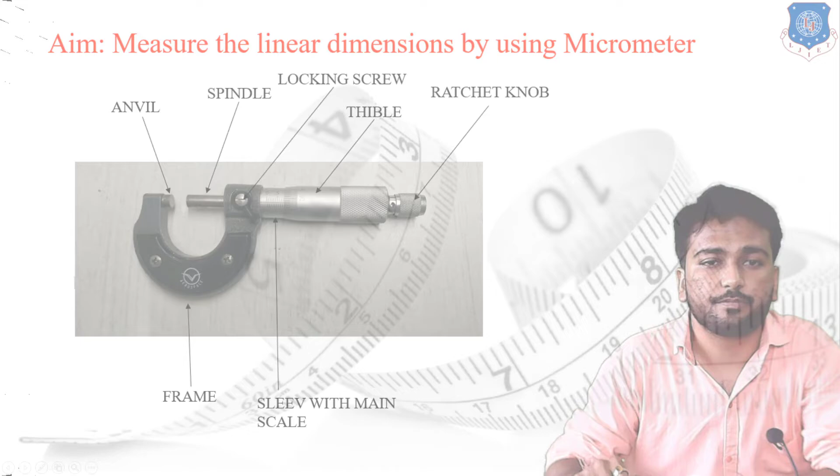We have the micrometer.

As we have discussed in the micrometer section, this is known as an anvil, this one is a spindle. The particular rotating scale is known as a thimble, on which there are total 50 divisions. This particular sleeve contains the main scale. The minimum distance marked on the main scale is 0.5 mm.

The last portion is known as a ratchet. The ratchet is generally used to close your micrometer. Once the micrometer has been closed, to lock it with a proper firm physical contact, we use the ratchet knob. This particular sound shows that your micrometer is properly closed and the physical contact is firmly placed.

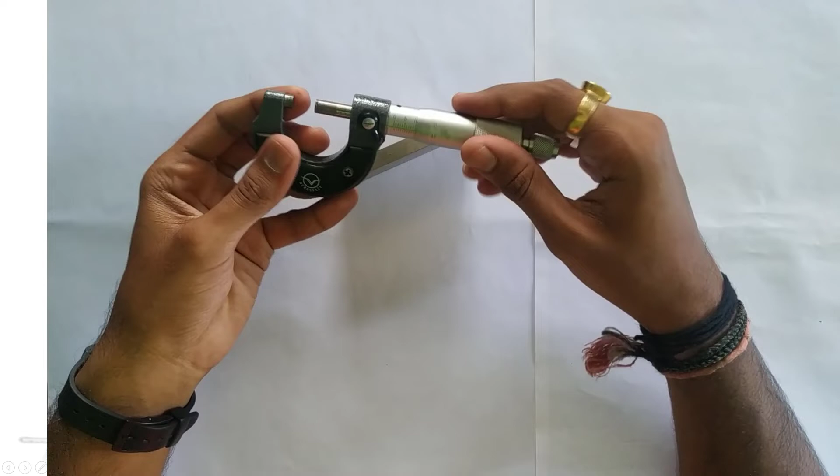So let us start the reading by using the micrometer. First of all, we are going to find out the thickness of the given component. To measure it, first extend your micrometer, then place it to make proper physical contact with the surface, and then close your micrometer using this ratchet knob.

The particular sound shows that the surface of the anvil and the spindle of the micrometer is properly and physically attached with your given workpiece. Now we are going to take the reading.

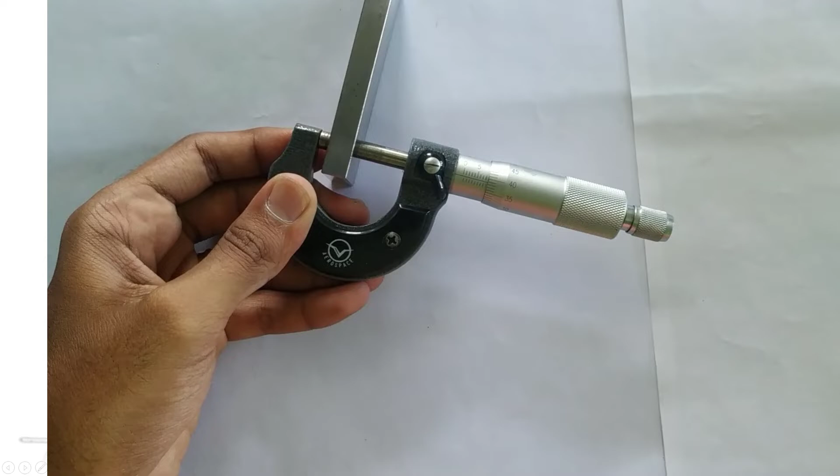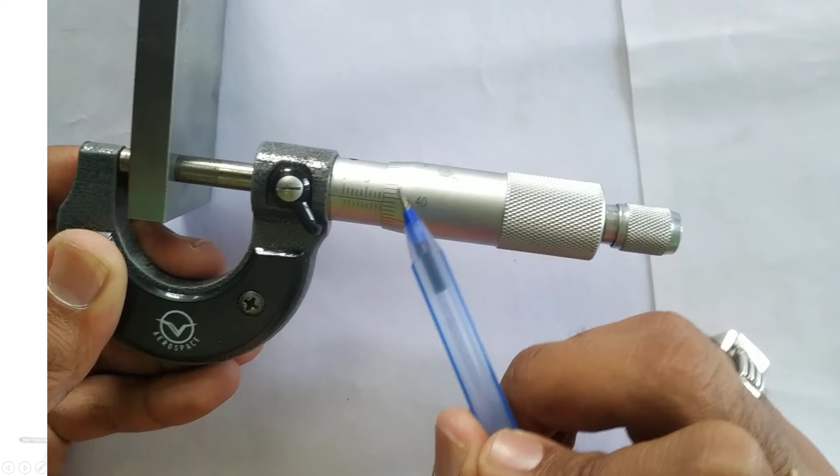For the reading purpose, first check the main scale. In the main scale, as you can check, some divisions are placed above the line and some divisions are placed below the line. So to take the reading, we have to check both divisions.

The upper division shows 0 mm, then the second one is 1 mm, then 2 mm, 3 mm, 4 mm, 5 mm, 6 mm, and so on. The bottom section shows 0.5 mm, then 1.5 mm, then 2.5 mm, and so on.

So to measure the dimension, first check 0 mm, then 1, 2, 3, 4, 5, 6, 7 and 8 mm. The division of 8 mm is properly visible. Then moving to the bottom side, you can check that 8.5 mm is also visible. So we can say that 8 mm and 8.5 is visible, and the main scale reading is 8.5 mm.

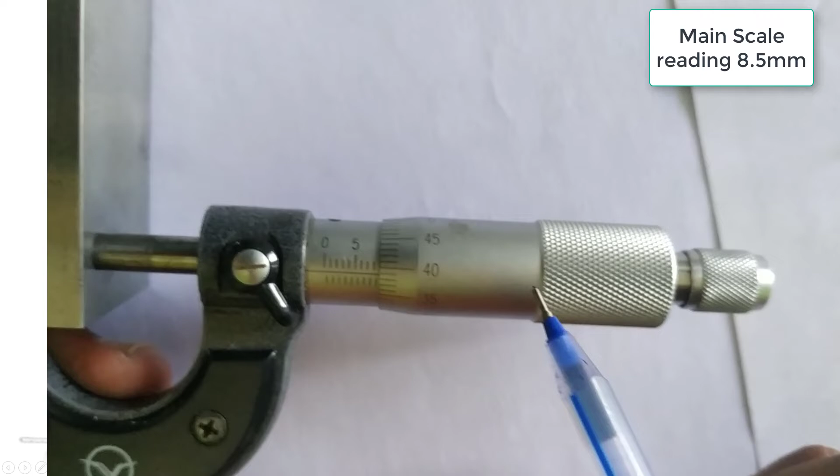Now moving to the thimble line. Check which particular division horizontally coincides with the center line. So here we have 35 mm, then 36, 37, 38 and 39. The line at 39 properly coincides with the horizontal line. So we can say that the auxiliary scale reading is 35... the division is 39, and the main scale reading is 8.5 mm.

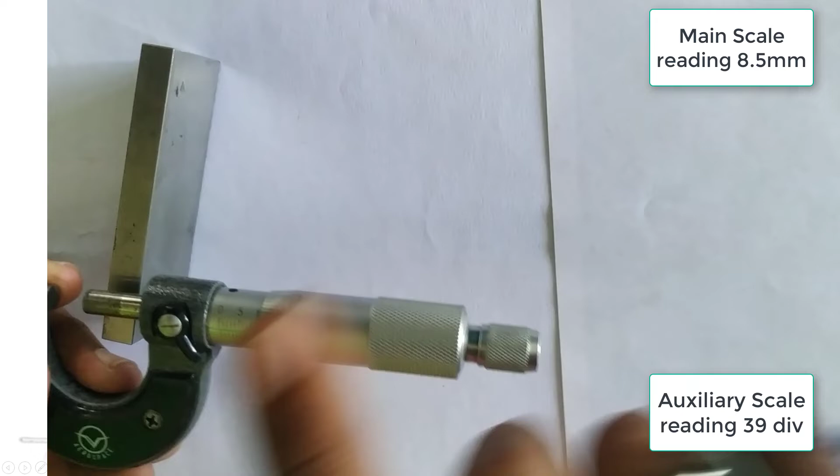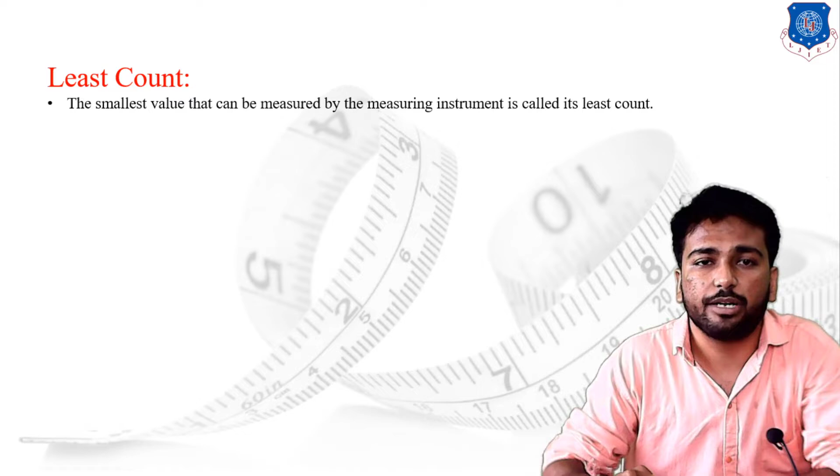Now let us move on to the calculation portion. Before that, let us understand the least count. The least count is the smallest value that can be measured by using the measuring instrument. For the micrometer, the least count will be 0.01 mm.

Now let us calculate the practical reading we have taken. We know the equation: final reading equals main scale reading plus auxiliary scale reading into the least count. For our reading, the main scale reading is 8.5 mm, the auxiliary scale reading is 39 division, and the least count is 0.01 mm. Putting these values into the formula: 8.5 mm plus 39 into 0.01. So our final reading becomes 8.89 mm.

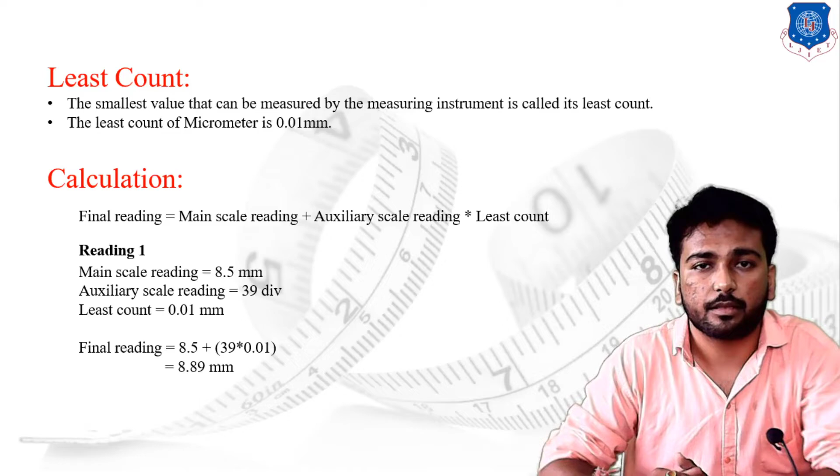Now let us go for the second reading.

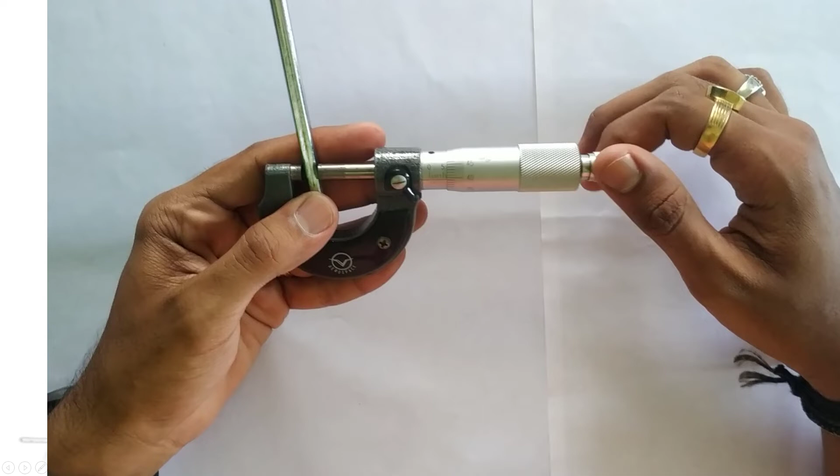Now let us take the second reading. We have to measure the outer diameter of the given rod. First extend your micrometer, place your rod inside the jaws of the micrometer, then start to close it. Once it comes very close, use your ratchet knob to close your micrometer firmly.

First we move to the main scale reading. As we discussed, there are two divisions on the main scale reading: above the center line and below the center line. From this main scale reading, you can check that 0, 1, 2, 3, 4 is properly visible, 5 is properly visible, and 6 is also properly visible.

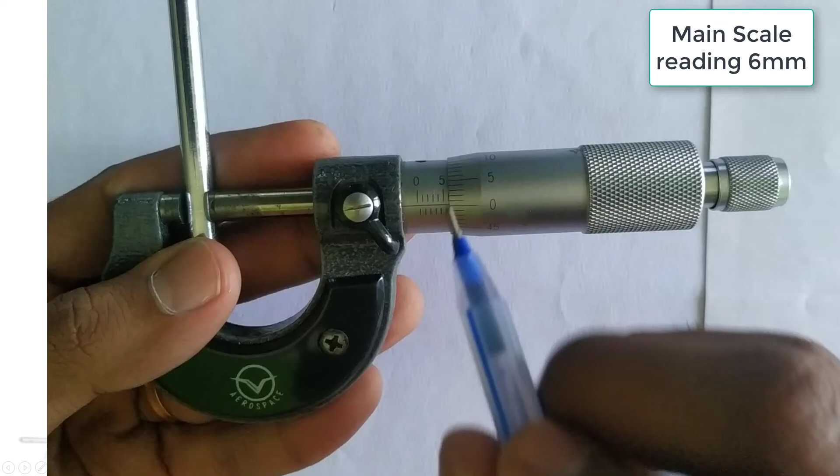So your main scale reading is 6 mm, and from the thimble, or auxiliary scale reading, you can check that the 0 is properly coinciding with your main line. So there is no auxiliary dimension for the given rod. The main scale reading is 6 mm, and the auxiliary scale reading is 0 division.

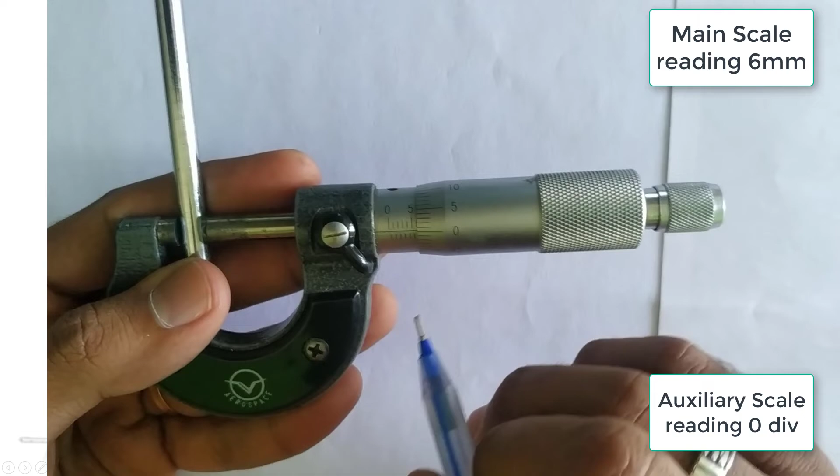Now we move to the calculation. We know the formula: final reading equals main scale reading plus auxiliary scale reading into the least count. For our reading, the main scale reading is 6 mm, the auxiliary scale reading is 0 division, and the least count of the micrometer is 0.01 mm. So final reading equals 6 plus (0 into 0.01). Our reading becomes 6 mm.

Now let us go for the third reading. For this reading we are going to measure the thickness of the given component. First extend your micrometer, place your component inside the anvil and spindle, then close your micrometer using the ratchet knob. The sound of the ratchet knob shows that your component is properly placed between the spindle and anvil.

To measure the dimension, moving to the main scale reading, first let us check which main scale reading is visible. We can say 5 is visible, then 6, 7, 8, 9 is visible, and you can check that 9.5 is also visible. So our main scale reading is 9.5 mm.

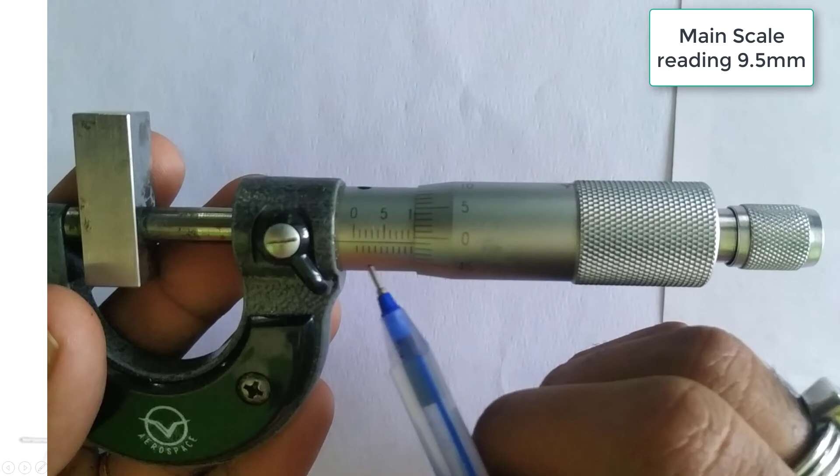Moving to the auxiliary scale reading, you can check from the thimble which division properly coincides with the main scale line. You can check that below the 0 line, that is the 49 number. The division number 49 properly coincides with the main scale horizontal line. So the main scale reading is 9.5 mm, and the auxiliary scale reading is the 49 number of division.

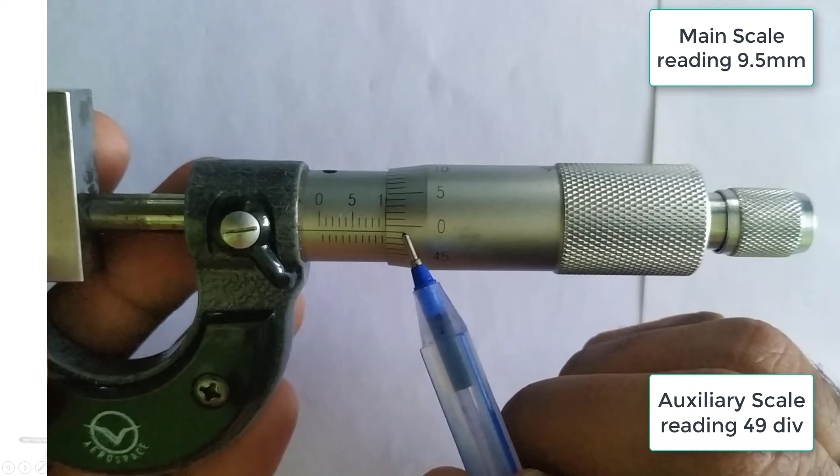Now we move to the calculation portion. We know the formula: final reading equals main scale reading plus auxiliary scale reading into the least count. Main scale reading is 9.5 mm, auxiliary scale reading is 49 division, and the least count is 0.01 mm. Putting all values into the final reading formula: 9.5 plus (49 into 0.01). So our reading becomes 9.99 mm. Thank you for today's practical session.